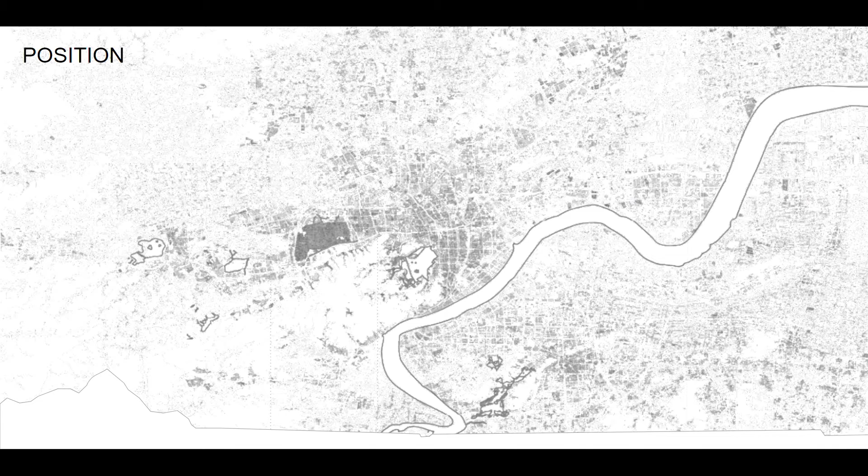Hangzhou has a subtropical monsoon climate with 4 distinct seasons. It is warm and humid with plentiful rainfall. The section that we have been working on is the transect in the north of Hangzhou, composed of 3 main sectors. For the first sector, we focused our project on the Xixi wetlands, located at the foot of the hills. This area is not highly urbanized yet, which increases the ecological importance for the city as a life reservoir.

The Xixi wetlands consist of 6 main watercourses. This area acts like a giant sponge for Hangzhou, limiting the effects of the flooding during heavy rains by absorbing excess water. They also act as a natural water treatment facility with plants, fungi, and algae to filter wastes and purify water. Wetlands are economically important for the fishing industry as well as recreational places for the city.

This sector is mainly defined by the Grand Canal, which crosses all the way through it from north to south. The Grand Canal is the only direct waterway between Beijing and Hangzhou, and it is the main focus for the second sector, along with the revitalization of the highly urbanized paved areas located in the surroundings. What defines Sector 1C is the Qiantang River, the main spine of the city of Hangzhou and the biggest of the Zhejiang province. It is an abundant river, rich in biodiversity and gives shape to urban distribution.

The challenges the first section faces are oriented to protecting and restoring the wetlands, implementing an urban expansion control strategy to eliminate the high risk of hyperurbanization and overfishing and farming, preserving and increasing the ecological value of the area. The aim is to store as much water as possible while purifying it through the plants, restoring the whole ecosystem and developing a healthy relationship between inhabitants and the environment.

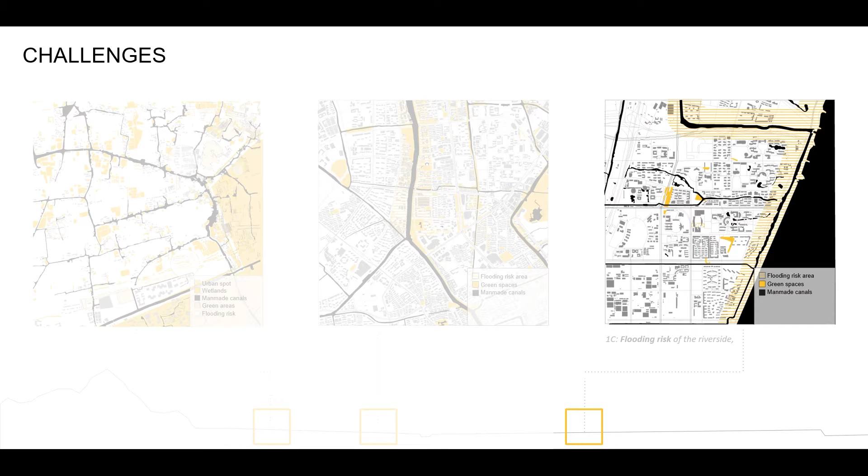For the second sector, the challenge is the lack of infiltration areas, which propitiate floodings by water accumulation on the surface. The main challenge to face in the third sector is its proximity to the Qiantang River and the flooding risk due to storm surge.

Our proposal is focused on providing the targeted solution to the specific conditions of the samples following the natural flow of the river: the upper sample with a main focus of infiltration for water retention, the middle sample with the target of restoring the actual paved areas, and the lower sample as a water level control. This is to be applied to similar position areas all over Hangzhou.

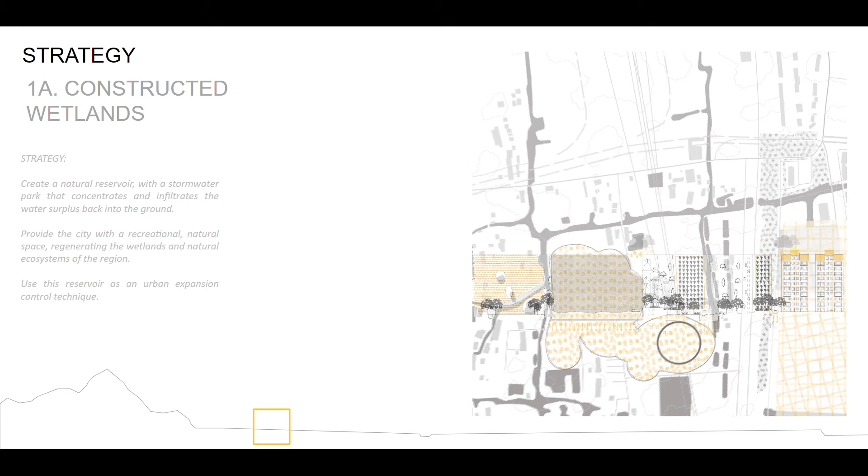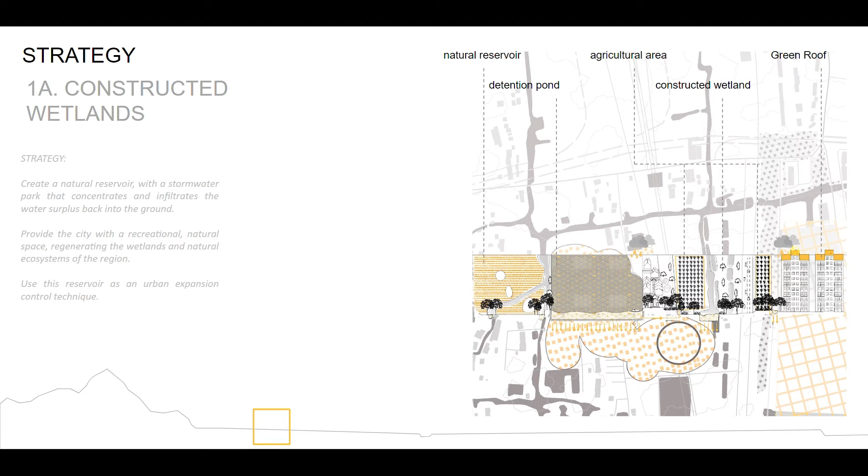Following the challenges previously explained, the aim of the project in this area is to create a natural reservoir and stormwater park that concentrates and infiltrates the water surplus back into the ground, enriching the ecosystem and maintaining its role as a carbon sink for the region. This will also provide the city with a recreational natural park and an urban sprawl control strategy.

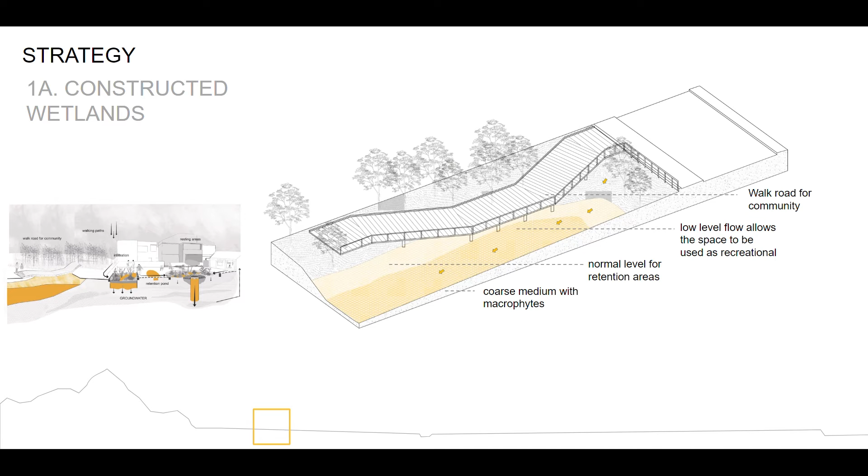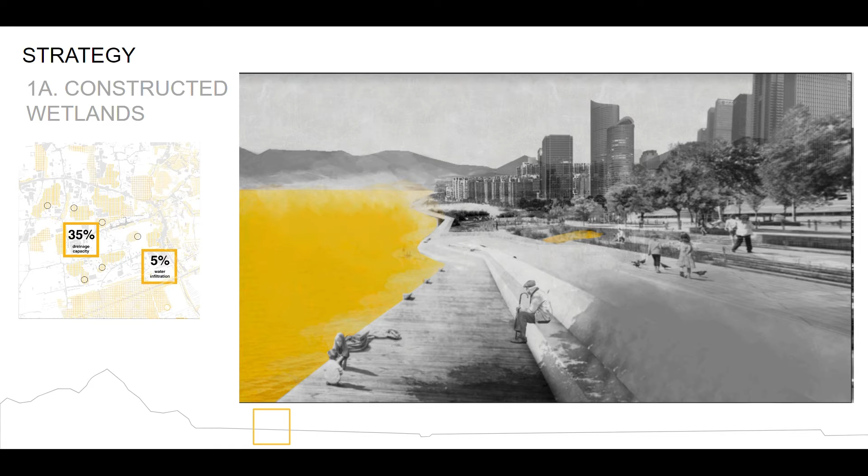The main project consists of creating a stormwater park that both preserves the ecosystem and generates a water retention area for the city. Also, the creation of elevated wood paths for the citizens, set up following the oriental style of the public space and bridges, to be in direct contact with nature without disrupting its cycle. These paths, as you can see in the picture, connect the city and create a safe space for recreation and the enjoyment of the scenery, while preserving and creating the new ecosystem. By applying these strategies, we reach our goal of increasing permeable areas by 5% and drainage capacity by 35%.

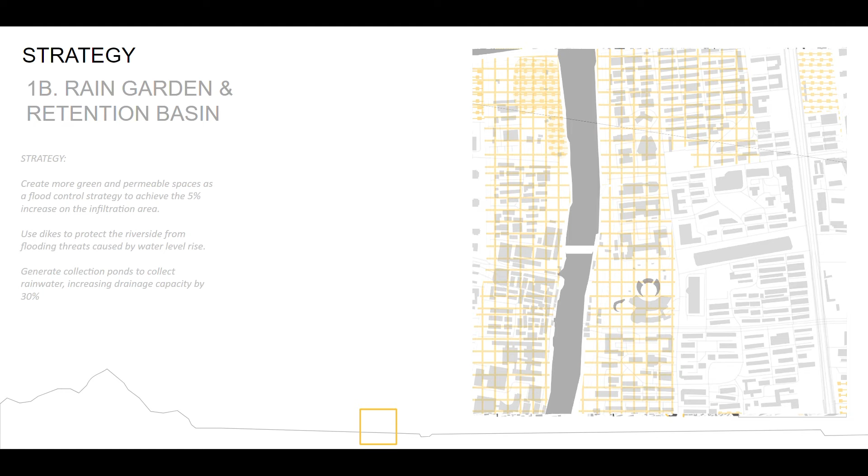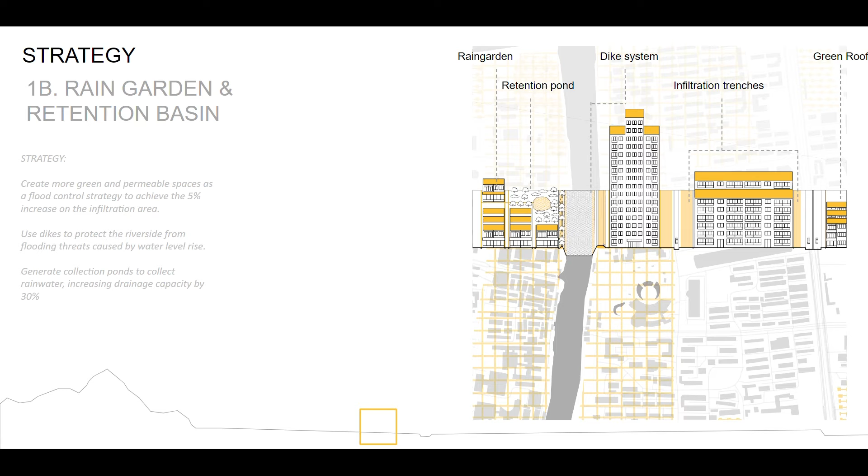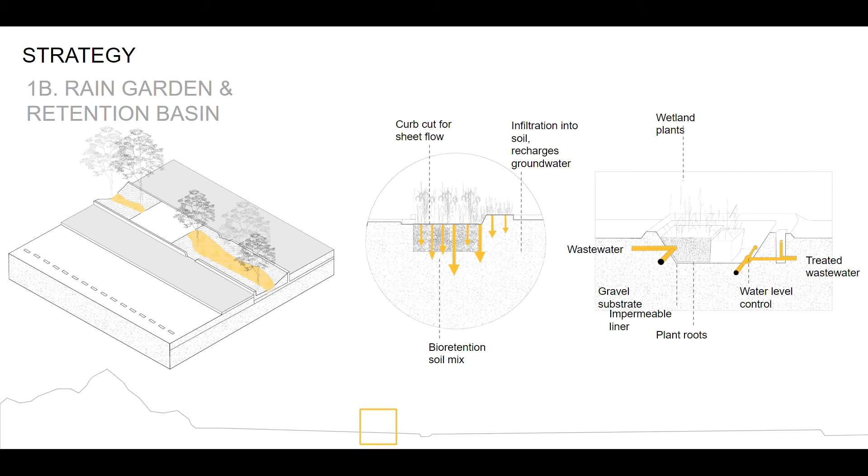The strategy for the rain garden is to generate more permeable area to control the flooding and allow infiltration back into the aquifer. We're creating water retention ponds to store water for usage or recharge the groundwater. In addition, a dike will be used to protect the area near the canal from flooding in case of water level rise. A retention basin will be created along the road, allowing water to infiltrate back into the soil, and at the same time working as flooding protection areas. By applying these strategies, we reach our goal of increasing the permeable area by 9% and the drainage capacity by 30%, as well as augmenting canals by 5%.

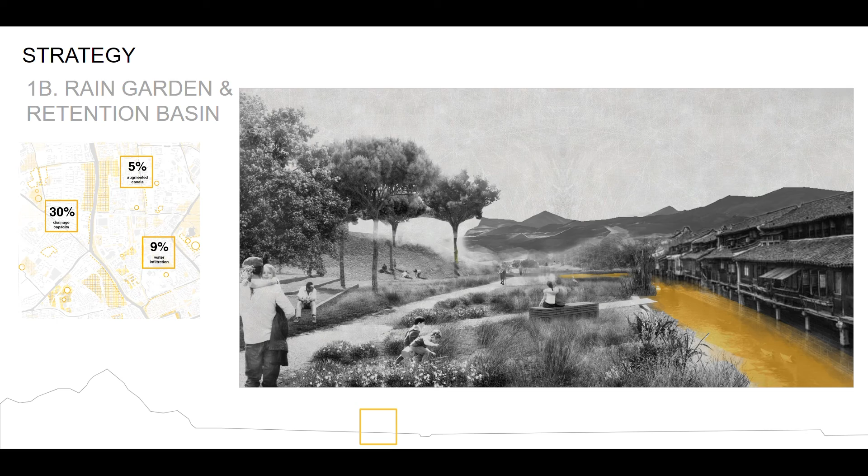The main strategy that will be implemented here is a smart barrier that can protect the nearby constructions and people while providing public green space. Moreover, we will use a projection and recession trace along the river, redefining its banks to give water more space, enabling a functional barrier while integrating the Qiantang River to public space along Hangzhou.

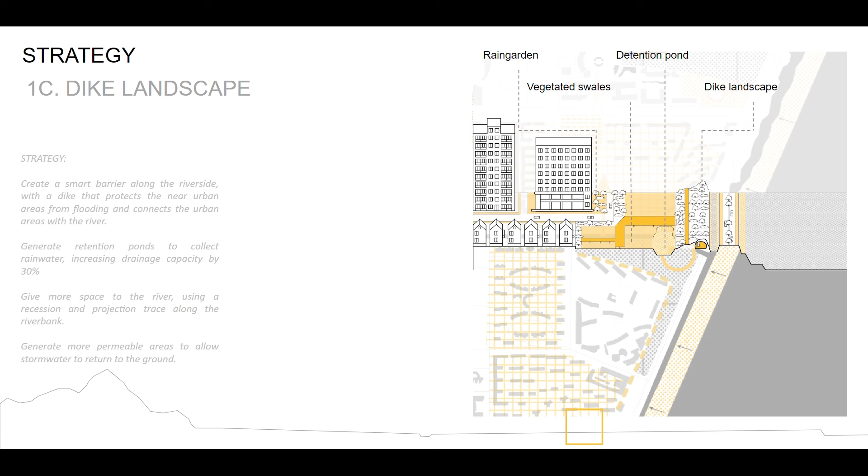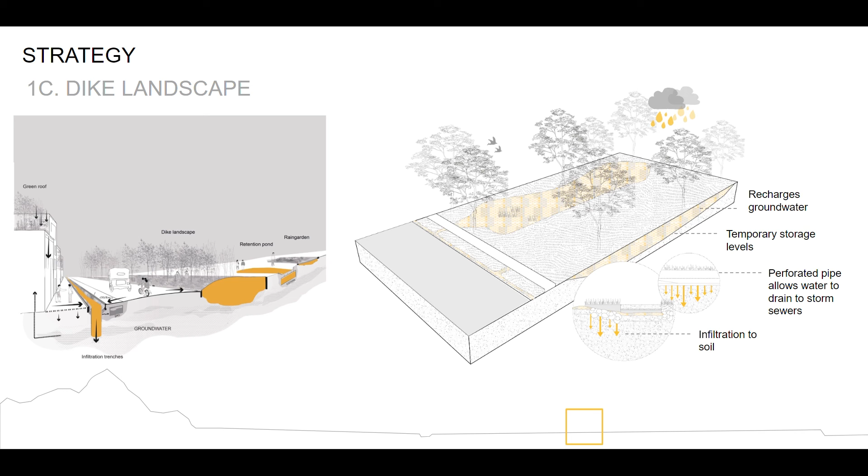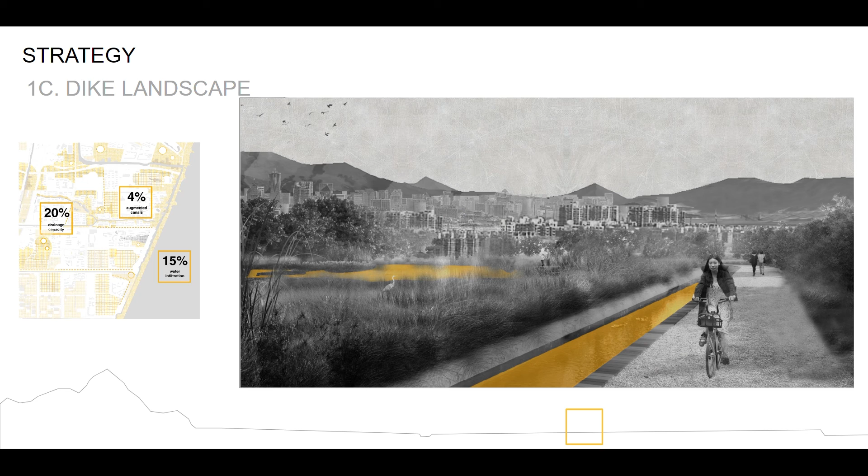Aside from the dike's smart barrier, there is also protection by detention ponds in clear areas found along the Qiantang River. This strategy provides a temporary storage space where water is partly delivered to rainwater sewers and partly infiltrated and returned to the underground water flow. By applying these strategies, we reach our goal of increasing permeable areas by 15% and drainage capacity by 20%, and the canals augmented by 4%.

These specific strategies will be used as models, as guides to be replicated not only in their sectors. The objective is for them to be applied to different areas all over Hangzhou, creating a multifunctional metropolitan park with quantitative and qualitative objectives to improve water management and the life quality of the inhabitants.